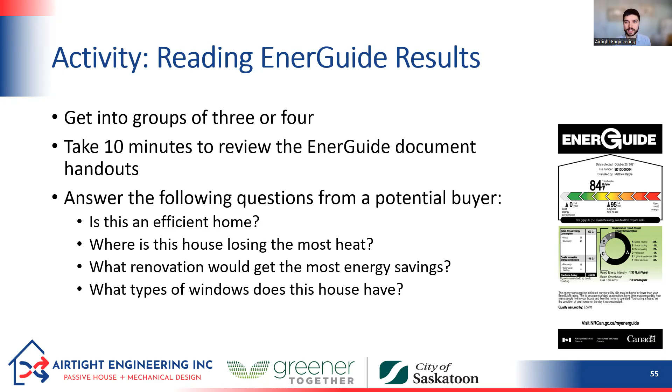Okay. At this point, presuming you've had a chance to go through those, let's take a look together. So first question, is this an efficient home? So I'm just going to bring over my documents here. To answer that question, I'm going to go to the EnerGuide label. So our first document, it's just a single page. And I'm going to look at this house in relation to a typical new house. So this house is using 209 gigajoules per year versus a typical new house at 130 gigajoules per year. So I'm going to say no. That's going to be my answer. It's using much more energy than a typical new house. So this house is not efficient.

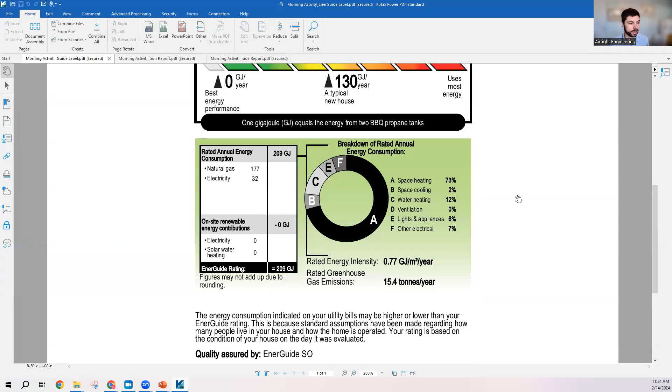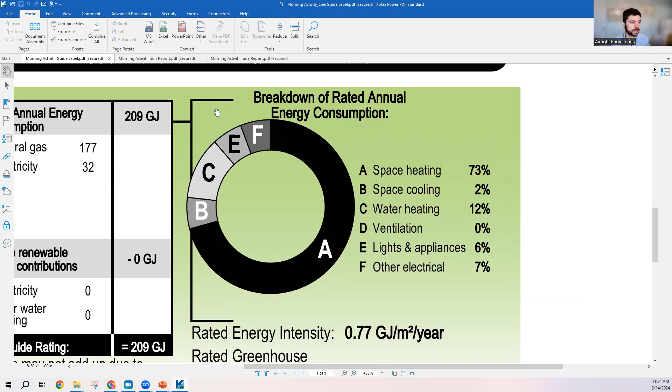Our second question is, where is this house losing the most heat? So I might be able to tell that again from this EnerGuide label. So let's just scroll down a little bit. There we go. I can see it right here. So looking at the breakdown of annual energy consumption, I see space heating. Oh, but it's not breaking it down any more than that. It's just telling me that space heating is the biggest energy use, but I want to know where it's losing the most heat. So let me try the homeowner information sheet.

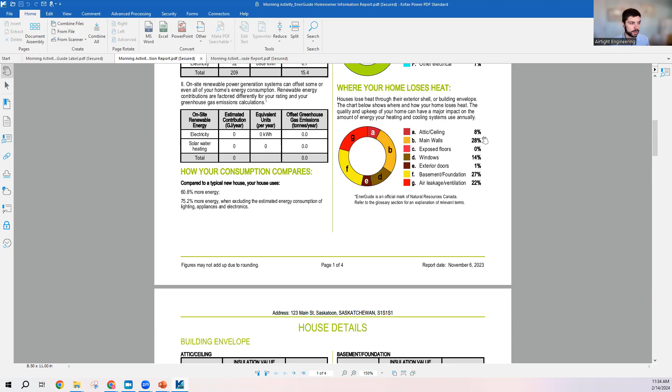And if I scroll down a little bit on this first page, here I see what I'm looking for. So it says here, oh, zoomed in too much, where your home loses heat. So I've got all of these different locations. And if I look through, I can see it looks like the main walls, 28% of my heat loss is through the main walls. So this is my biggest heat loss in this house, is the main walls.

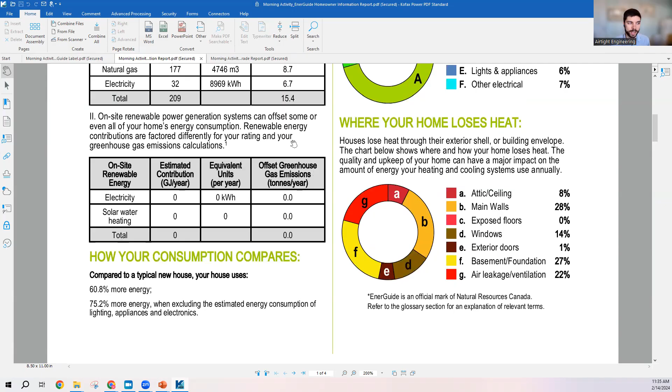Moving on to question 3. The question is, what renovation would get the most energy savings? I'm going to hazard a guess that I'll find this in the renovation upgrade report. So let's take a look through. First page, I've got this energy efficiency roadmap, and I can see 4 measures here: perform air sealing, insulate attic, insulate main walls, upgrade windows. A savings of this one is -3 gigajoules per year. That should be +3. I'm not sure why air sealing is negative here. Insulate attic would save 4 gigajoules. Insulating the main walls would save 3, and upgrading windows would save 1.

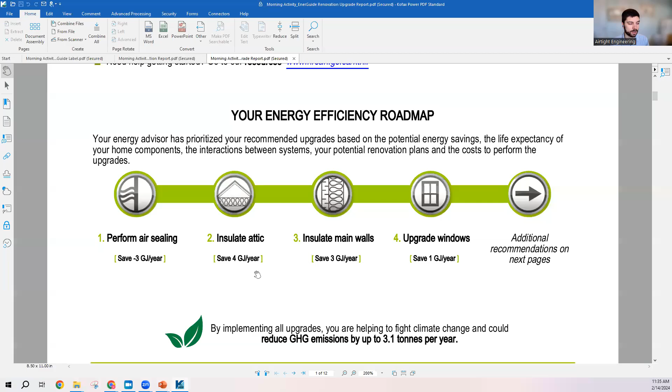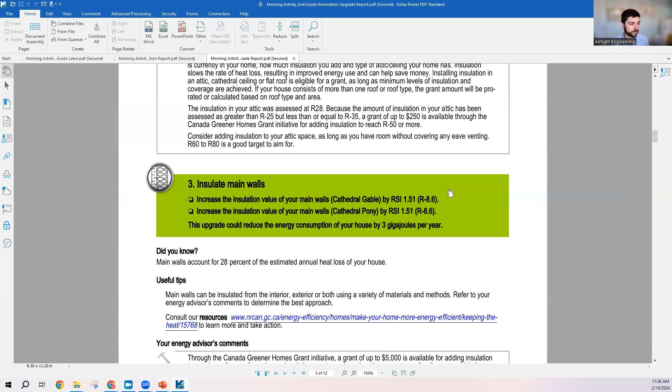So you might be tempted to look at this and say, wow, insulating the attic, this is our biggest energy saver. But you do have to look further in the report, because see this part where it says additional recommendations. So let's just scroll through. So perform air sealing, insulate attic. These are the first 4 that we saw: insulate main walls, upgrade windows. But if we keep going, we'll actually see that there are more than 4 recommendations. So let's just scroll through them all.

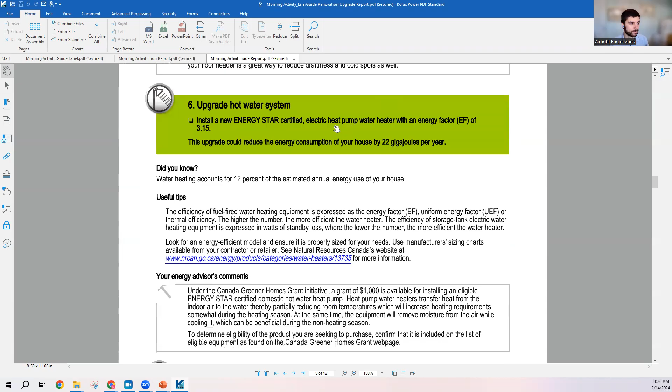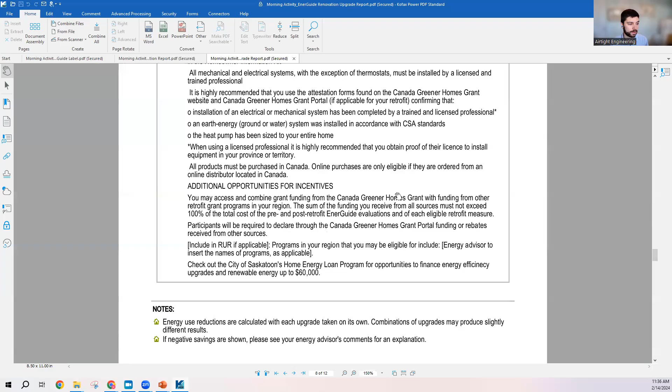So this one, insulate the foundation, would actually save us 10 gigajoules per year. So far that's in the lead. Upgrading the hot water system would save us 22. Now that one's in the lead. Upgrading the heating system could save us a whopping 75 gigajoules per year. Upgrading the cooling system would save us 0. Ventilation system would actually save us 2. And that's all that we have. So after looking through the whole report, I'm going to say upgrading the heating system is going to save us the most energy in this house.

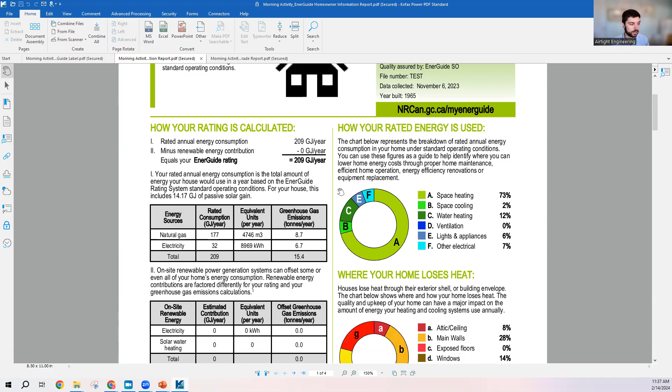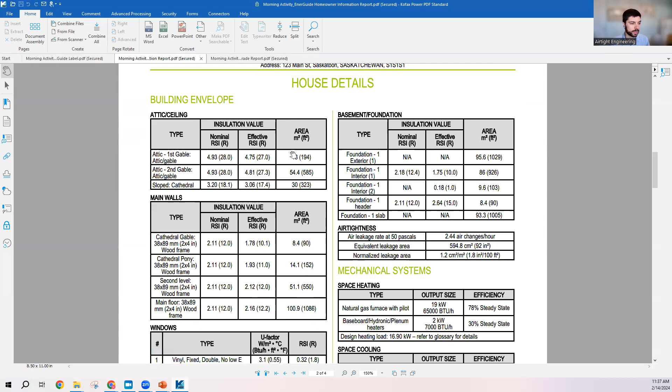The final question in the activity is, what types of windows does this house have? So again, I'm going to hazard a guess at the homeowner information sheet. So it's less to do with upgrades, more to do just with general information. Let me scroll through. I don't see anything on the first page here. It's mostly about energy use and type of energy. The second page, perfect, house details. So let's look. We've got building envelope on the left, mechanical systems on the right. Here we go, windows, perfect.

So it looks like there are actually a few different types of windows. I've got vinyl frames fixed. So this is just referring to whether you can open the window or not. Double, so that'd be a double pane window, 2 panes of glass. No low E, so low E coating has to do with the reflective coating that can reflect heat from the sun out and also heat from the room back in.

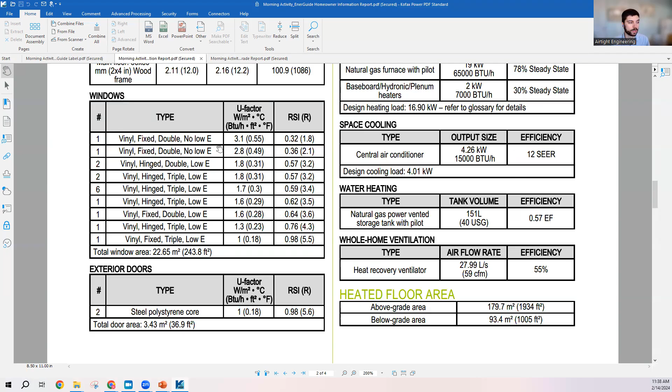So it looks like I actually have, I would say, kind of 3 main types of windows. I've got these vinyl double pane with no low E coating. I've got vinyl double pane with a low E coating. And then I've also got vinyl triple pane with a low E coating. So I've got 3 different types of windows, and then some of those are operable. I can open them, and others are just fixed. So looks like I've got 3 different types of windows in this house. So probably some of them were upgraded at some point and others weren't. And there you have it.

Okay, so that's a quick spin through the documentation for an EnerGuide audit that a homeowner might show to you and how we could work through it to answer some of the questions they might have.